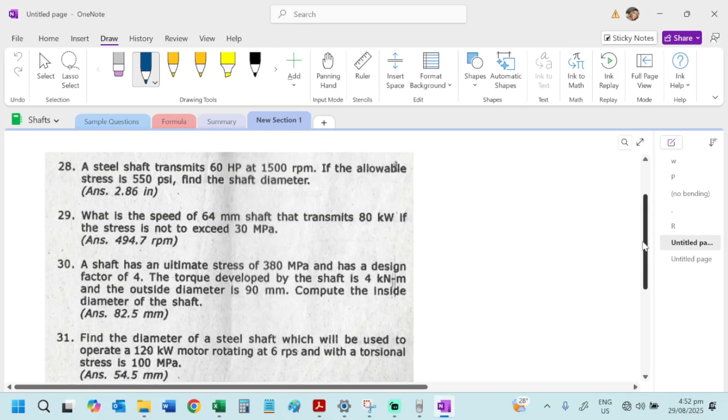So we are on the last part of the 30 problem sets that we have here. Let's finish this now.

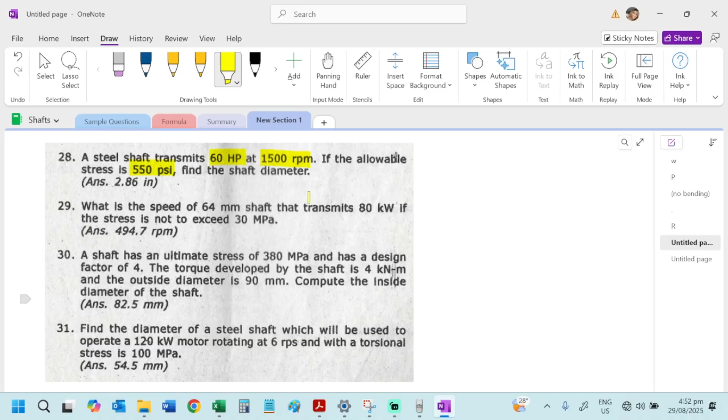Okay, so for number 28: a steel shaft transmits 60 HP at 1,500 RPM. If the allowable steel stress is 550 PSI, find the shaft diameter. This is basic again, a repetitive process of solving it.

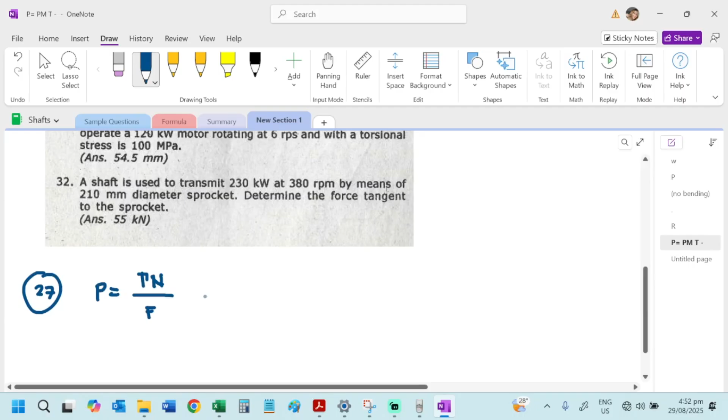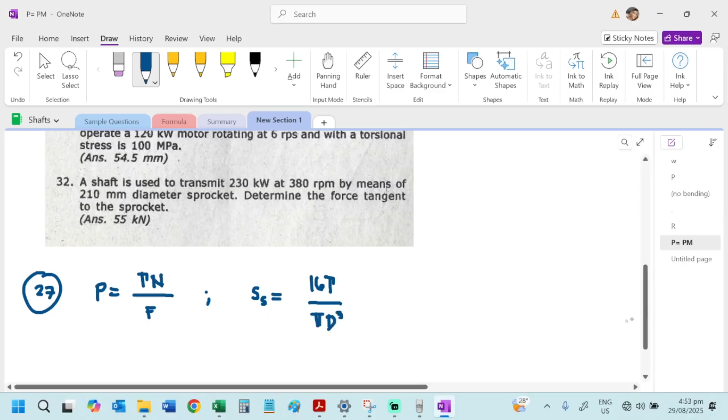So power is equal to TN over factor. You are given the stress, SS, and it's a solid shaft, I assume. SS equals 16T over pi d cube. What we're looking for again is, of course, the diameter.

So in terms of torque, we relate it to the power so we can substitute the torque into the SS equation. Let's solve for diameter: d cube is equal to 16T over pi SS. Now I want to solve it in terms of this.

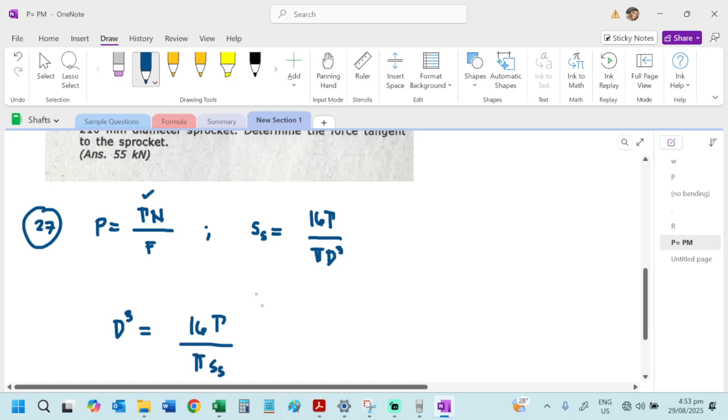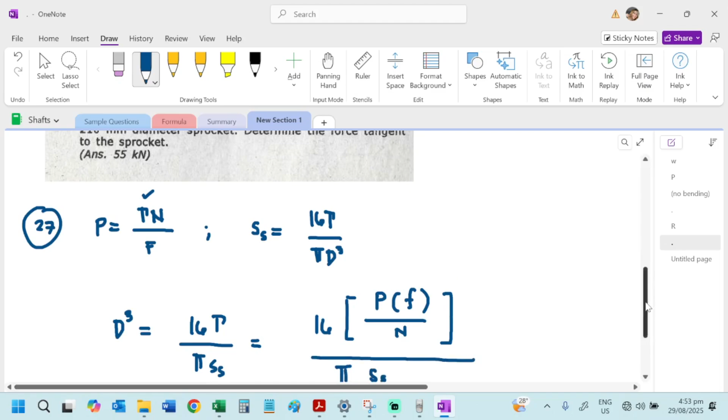So, 16 multiplied by power times the factor, divided by n, over pi times the stress. Now we can solve for diameter, so diameter cube is equal to...

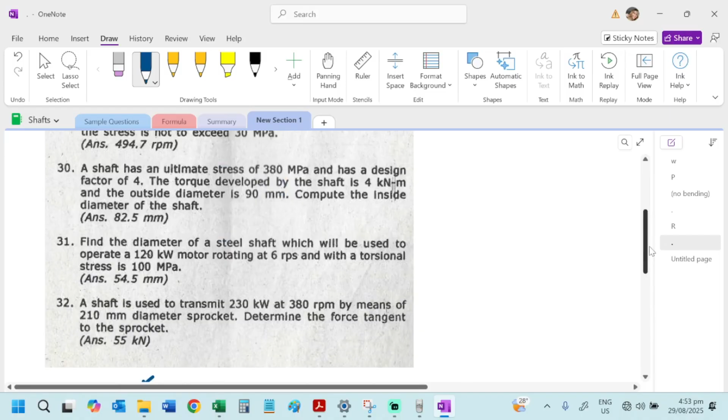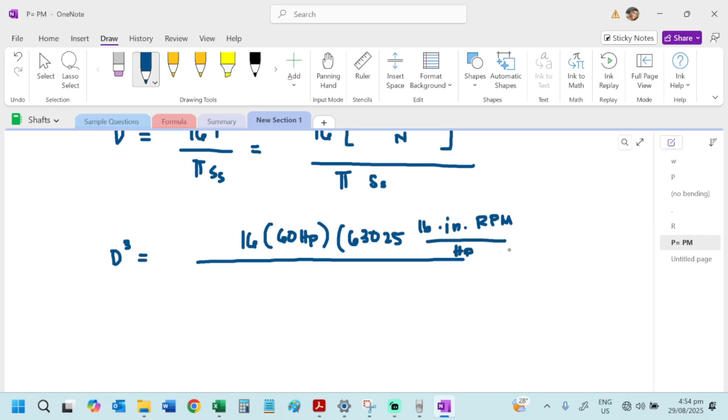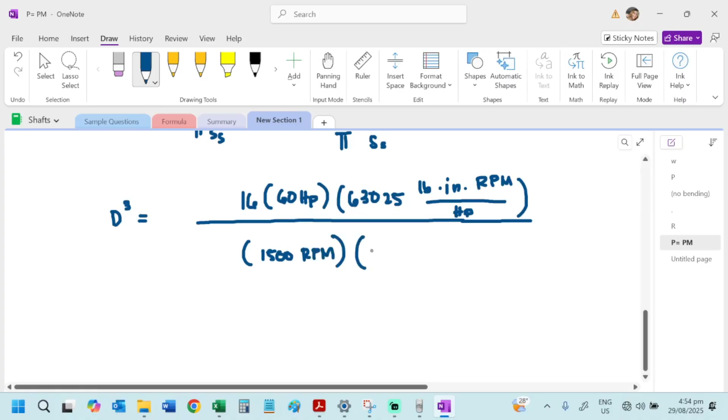16 times the power, which is 60 HP, multiplied by the factor of 63,025 pound-inch RPM per HP. Then our N, if I'm not mistaken, is 1,500 RPM. Then pi, and then our SS, if I'm not mistaken, is 550 PSI, that is 550 pound per inch squared.

So canceling all the same units, what will we arrive with? HP cancels, RPM cancels, pound cancels, leaving inch squared times inch since it's in the denominator as a reciprocal, giving inch cube. So we take the cube root of that to get D.

So D is input into the calculator for a faster process. This becomes: shift, 16 times 60 times 63,025, then below, 1,500 times pi times 550. So the answer is 2.86.

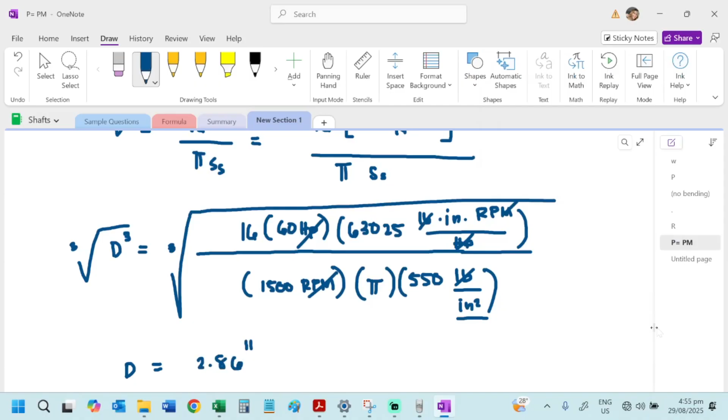2.86 inch, okay. So is that problem basic? Yes, very basic since we solved it in a matter of minutes. 2.86 inch, okay, 2.86 inch.

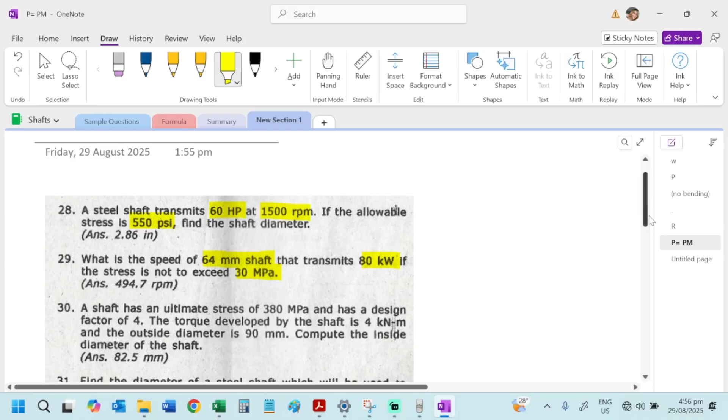So next problem: what is the speed of a 64 mm shaft that transmits 80 kilowatts if the stress is not to exceed 30 MPa? These types of problems are just repetitive, they just rearrange what's given to you.

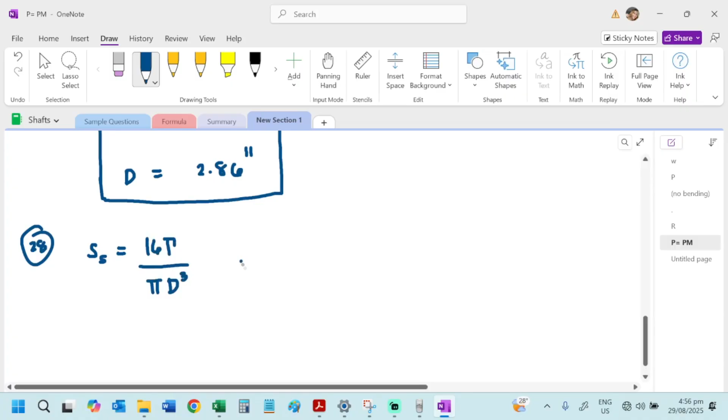So number 28, you are given the stress. How much is the stress? 30 MPa. So SS equals 16T over pi d cube, then power equals Tn over factor. What we're looking for here is N, so N equals power times the factor divided by torque.

Our torque can be expressed in terms of SS, so this becomes power times the factor, divided by the torque, where torque should be SS pi d cube over 16. Since the 16 is in the denominator, I'll bring it up to the top so we can now solve for n.

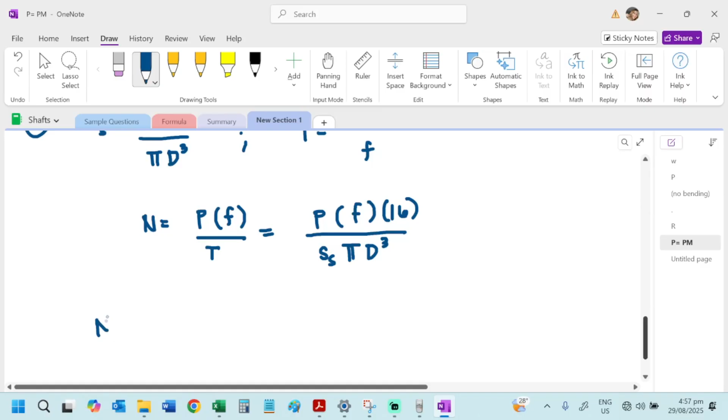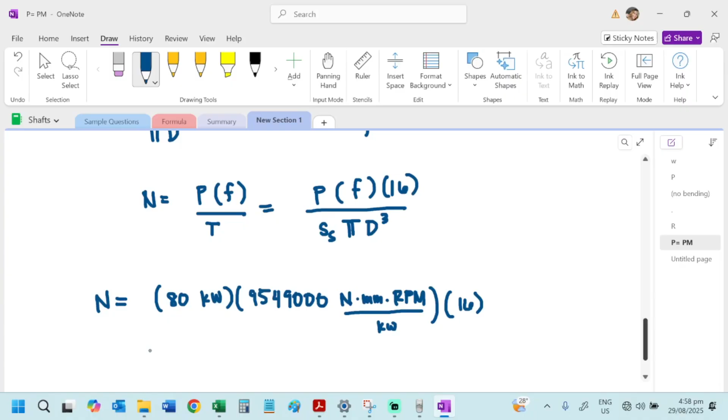So n will equal the power that is given, which is 80 kilowatts, times the factor 9,549,000 Newton-millimeter RPM per kilowatt, and then multiply it by 16. Divide both sides, all over 64 mm cubed, times pi, and then multiply by the stress not to exceed, 30 MPa, Newton per millimeter squared.

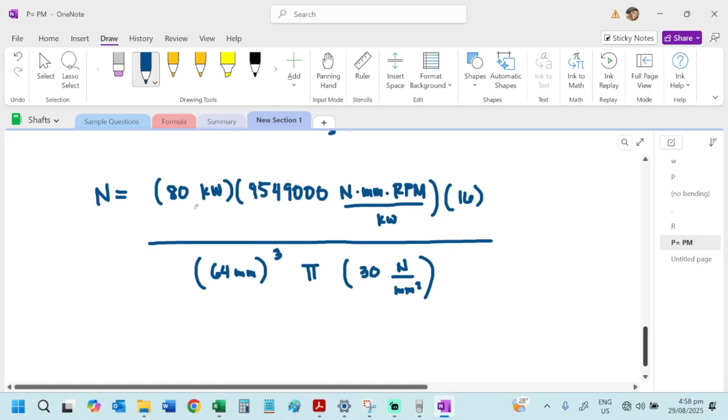Now the proper way to solve it is to cancel all the same units: kilowatt cancels kilowatt, Newton cancels Newton, millimeter cube becomes just millimeter with millimeter, so what's left is RPM. So how fast was it spinning?

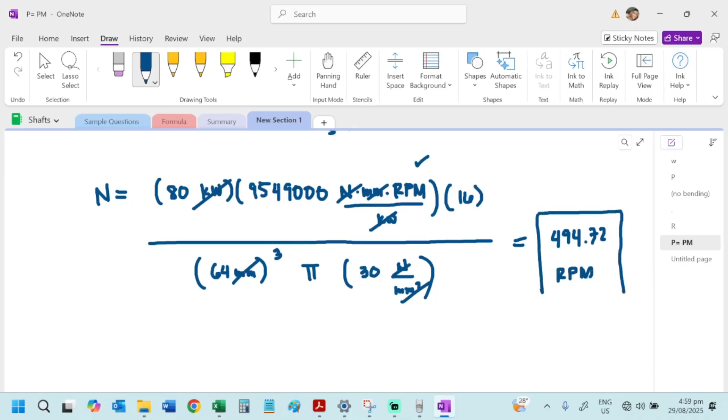So 80 times 9,549,000 times 16, divided by 64 raised to the third power times 30 times pi. So the answer is 494.72 RPM. Okay.

For number 30: a shaft has an ultimate stress of 380 MPa and has a design factor of 4. The torque developed by the shaft is 4 kilonewton-meter and the outside diameter is 90 mm. Compute the inside diameter of the shaft.

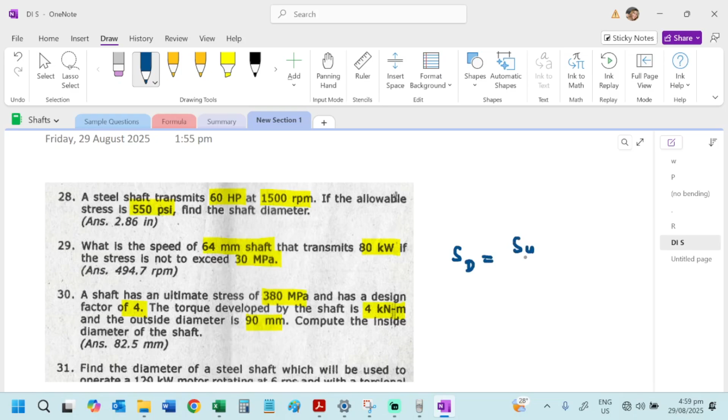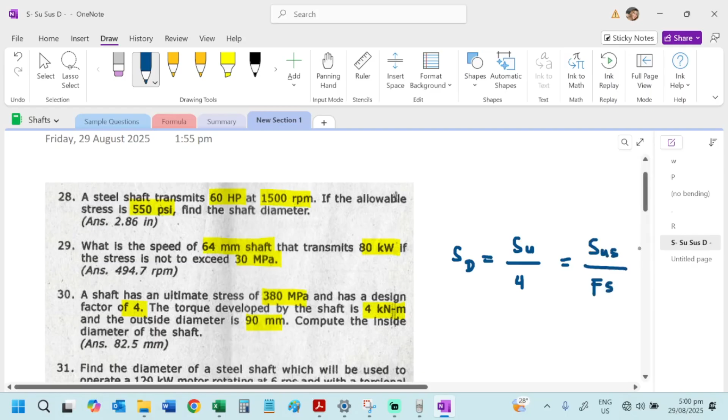I gave you a safety factor. Here's how it works: if you are given a safety factor of a shaft, and you have an ultimate stress, that means your design stress is the ultimate divided by 4, the factor. This is SUS over factor of safety, that is the design stress.

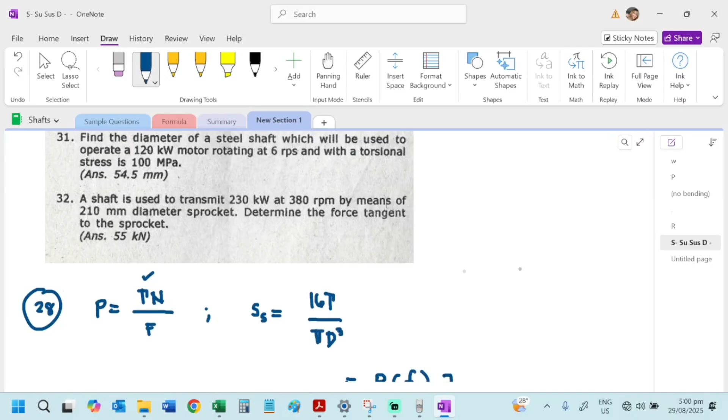Okay, number 30. So our stress will be SUS over factor of safety, and this is a hollow shaft: 16T DO over pi, DO to the fourth minus DI to the fourth.

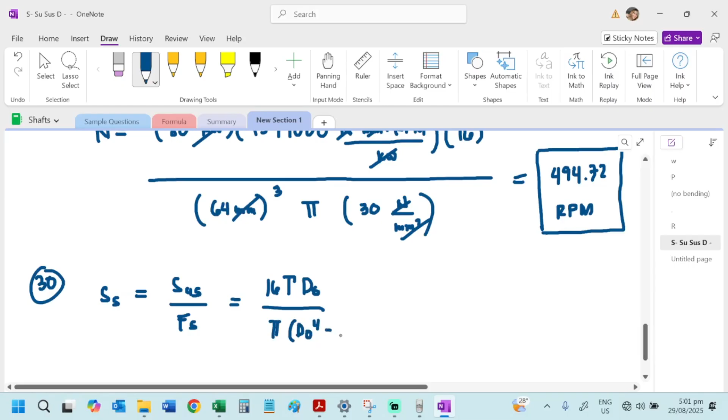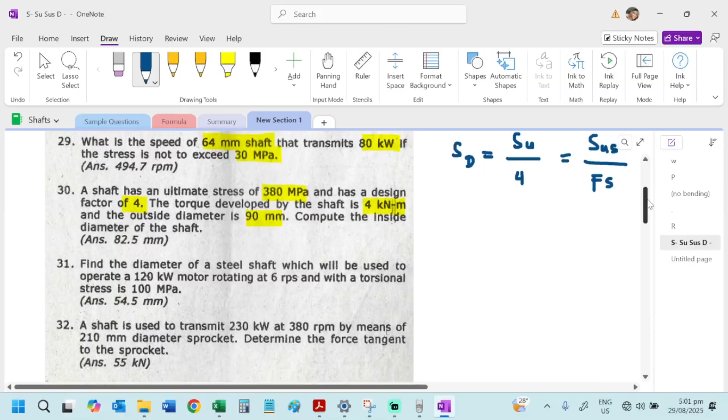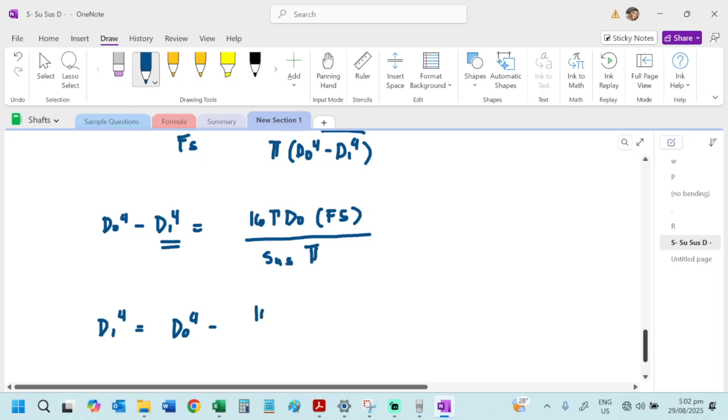I want to solve for DI. So DI raised to the fourth power is equal to DO to the fourth minus 16T DO multiplied by the factor of safety over SUS pi.

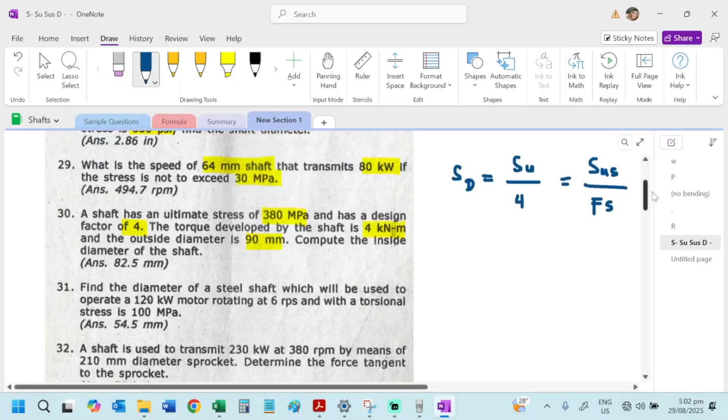Okay, let's plug in the values now. 90 mm raised to the fourth power minus 16 times the torque given, which is 4 kilonewton meter, so 4 times 1000 squared in Newton millimeter, multiplied to DO of 90 mm, then the factor of safety is 4, and SUS is 380 Newton per millimeter squared.

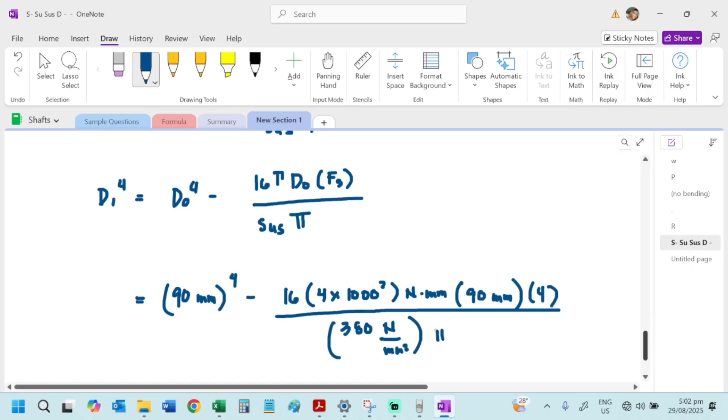And then multiply to the value of pi. So let's get the fourth root for the value. Okay, solving now.

So 90 raised to the fourth power, minus 16 times 4 times 1000 squared, times 90 times 4, divided by 350 and then pi, using the value of pi there.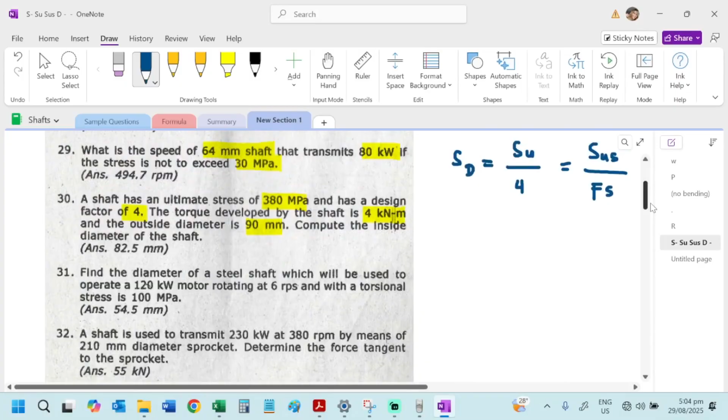The answer is DI. Let's check if the value is correct. So 82.5, our answer is 82.49. That's basic, 82.49 mm. The questions are really basic.

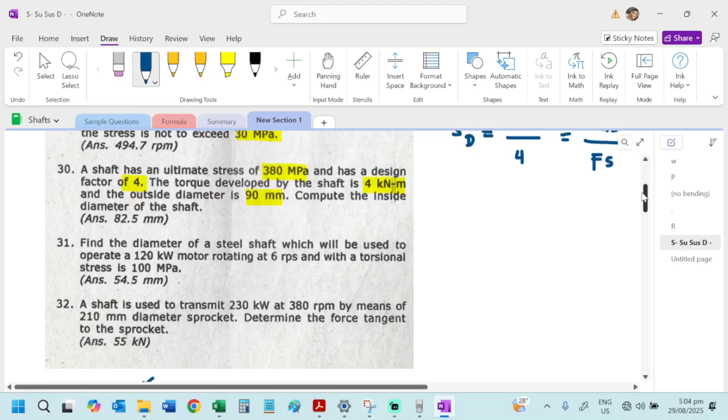So number 31: find the diameter of a steel shaft which will be used to operate a 120 kilowatt motor rotating at 6 RPS with a torsional stress of 100 MPa. It's a repeating process.

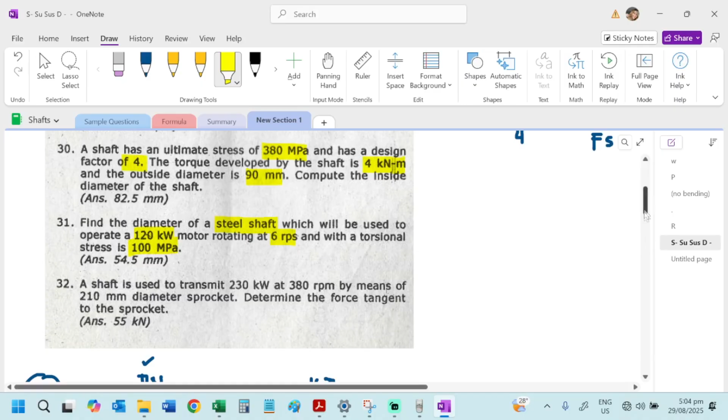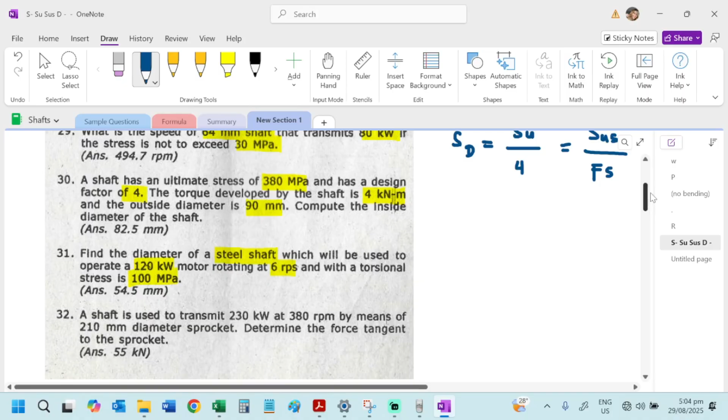What's being asked? The diameter. You're given the power, you're given N, and you're given the stress. So just solve for the diameter. That is for number 31.

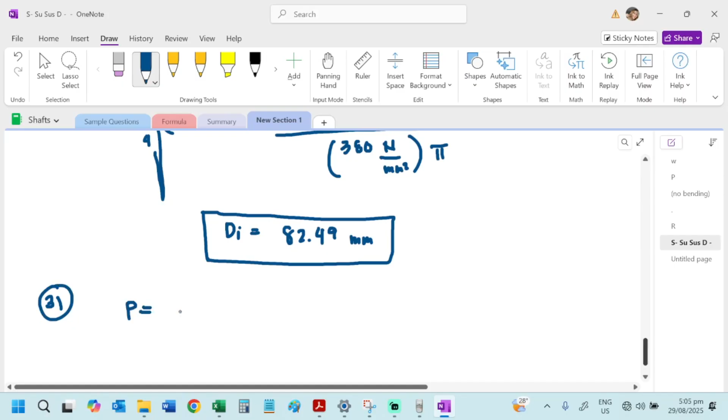For number 31, power equals torque times N over factor. Then your stress is equal to 16T over pi d cube. We're looking for d. So d cube equals 16 times power times factor divided by N. I already plugged in the torque here, then pi SS, so we can get d.

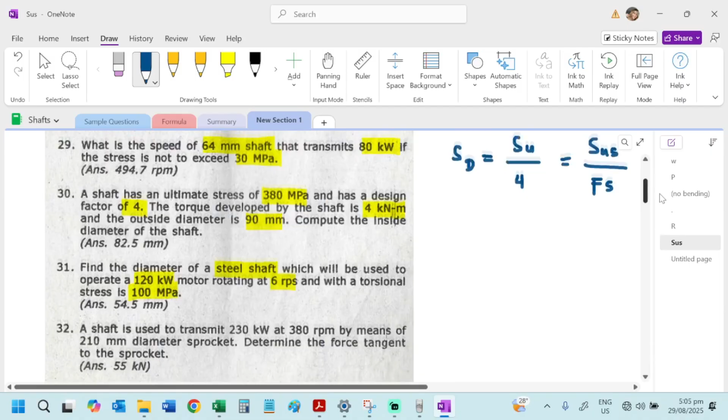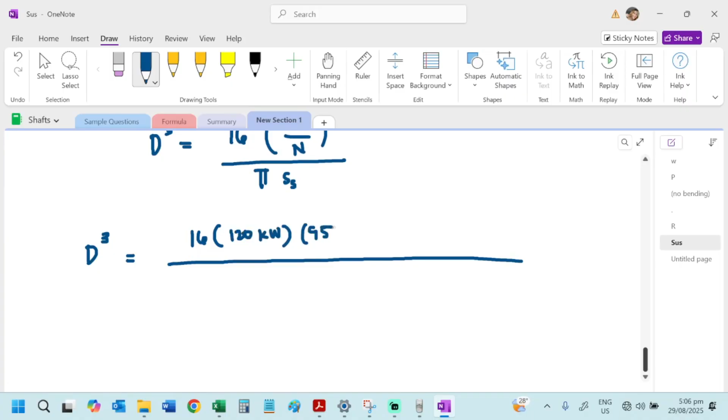d cube equals 16 times the given power: 120 kilowatts times 9549296 Newton millimeter RPM per kilowatt. Then our N is 6 RPS, so 6 rev per second times 60 seconds per minute. Then our SS is 100 Newton per millimeter squared, and then pi.

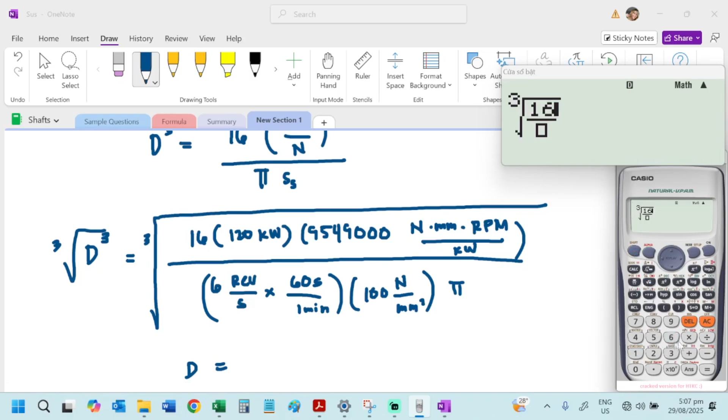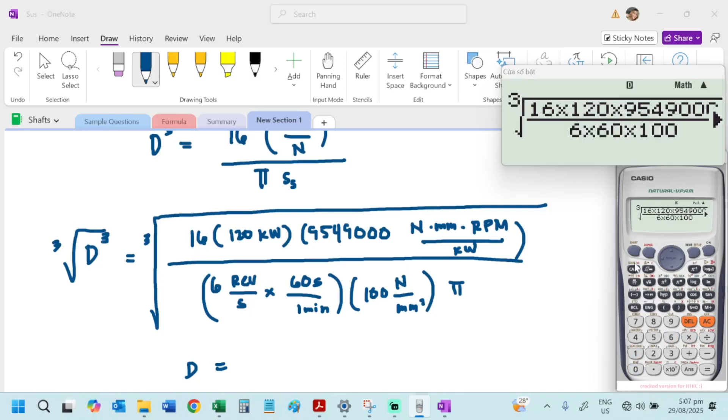Let's get the cube root of both to get D. So D will be equal to, plugging into the calculator: 16 times 120 times 9549000, then 6 times 60 times 100 pi. So the answer is 54.53 millimeter.

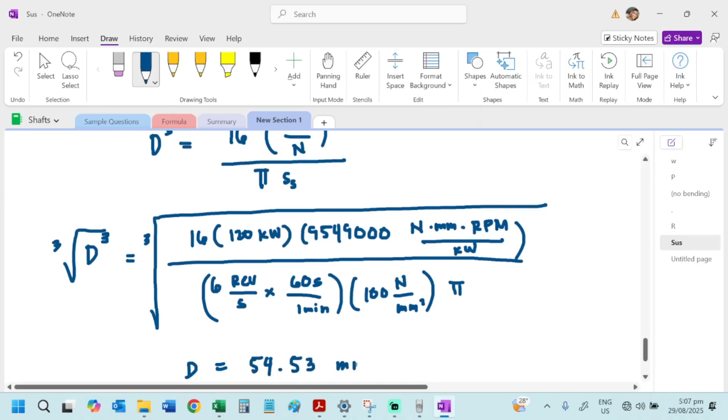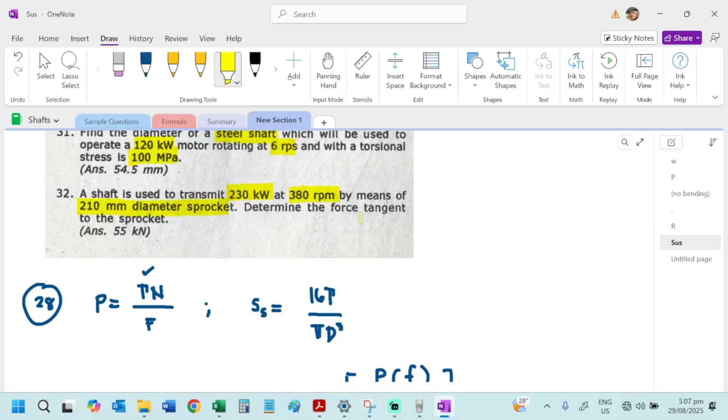That is for the second to last problem. And for the last problem: the shaft is used to transmit 230 kilowatts at 380 RPM by means of a 210 diameter sprocket. Determine the force tangent to the sprocket. Is that easy or hard?

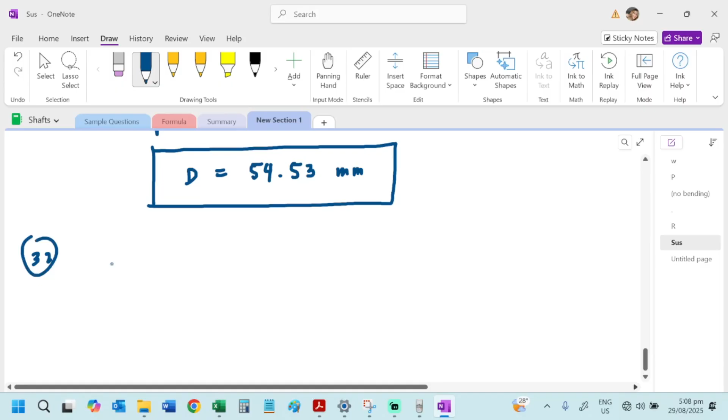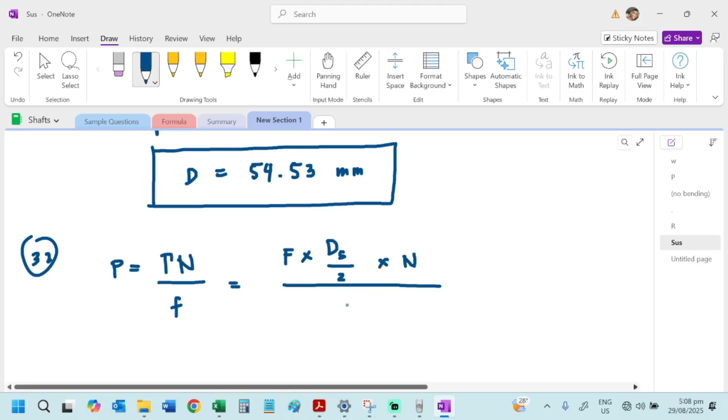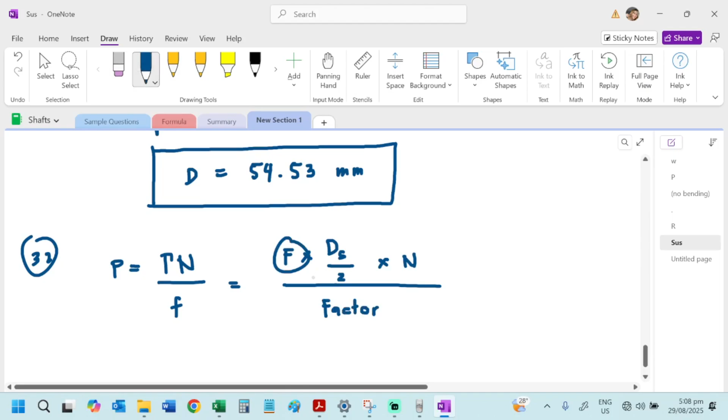So power is equal to torque times N over factor, where your torque is simply equal to force times diameter of the sprocket divided by 2, times N divided by factor. We're looking for F, let me rearrange for F.

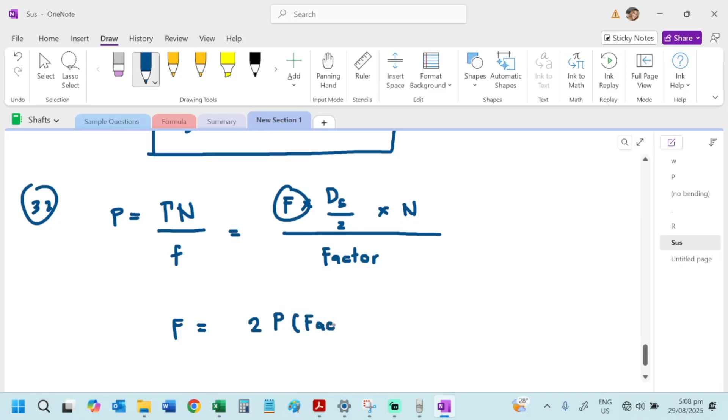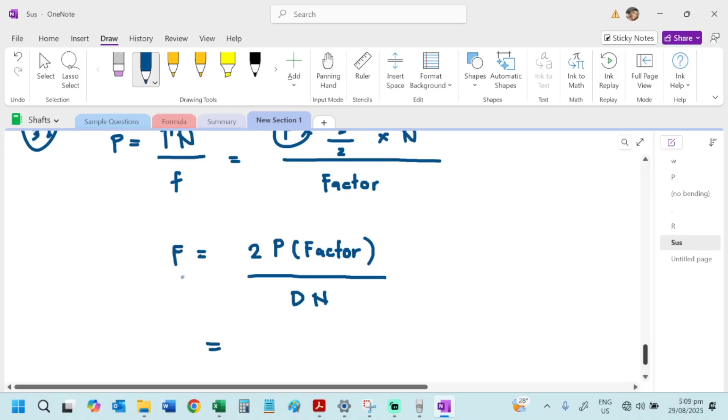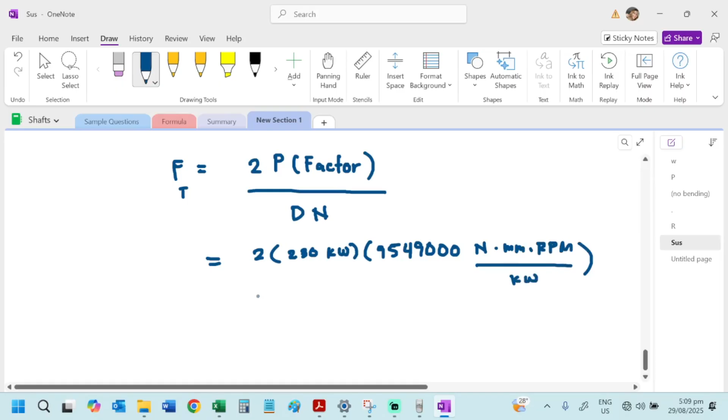So F will be equal to, as shown below, 2P times factor divided by dN. Force tangent again: twice the power. What is the power? 230 kilowatts times 9549000 Newton millimeter RPM per kilowatt, divided by diameter of 210 millimeter.

And then the speed is 380 RPM. So cancel all same units to arrive at the correct answer: kilowatt, RPM, millimeter, millimeter, so just Newton remains, so the answer is, I think, in kilonewton.

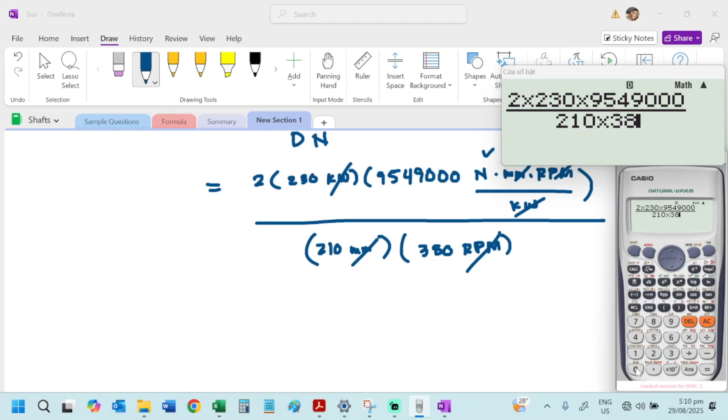So 2 times 230 times 9549000 divided by 210 times 380 times 1000 to convert to kilonewton. So that is 55.04 kilonewton, and I think that's the correct answer.

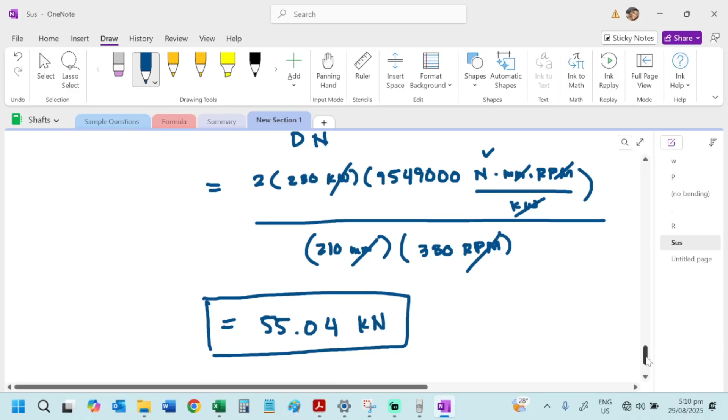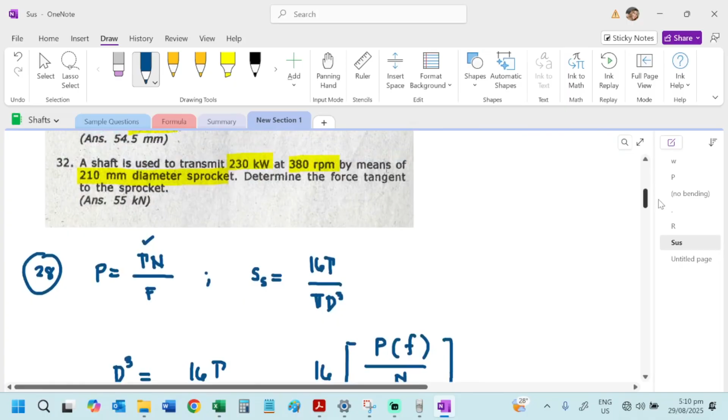Okay, so that wraps up our discussion for shafting. You have 32 problems and you can still practice on the problem sets that I have given you. Okay?